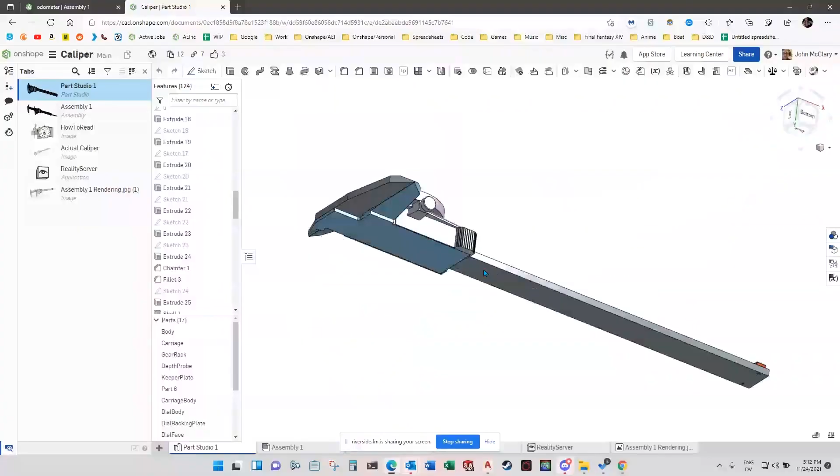Well, let's see the calipers that you made. You see my screen? Yeah, all right. So like I say, I did everything in one part studio - it's a little bit naive to put 124 features into a single studio, but I was kind of learning, and everything was pretty simple really. I worked a lot like I was familiar with, so the learning curve was really small.

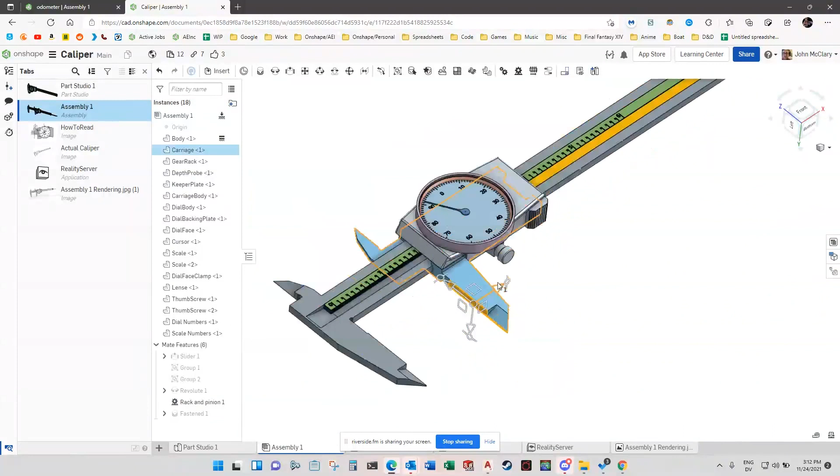Then I went into the assemblies and tried to see if I could get it to work. Oh, look at that, with relations - that's nice, there you go. I was also trying to test how precise that would be when you do an actual measurement with the tool.

I want to see what it actually read out is 1.691. Wow, so I was impressed how accurate everything was in rotations.

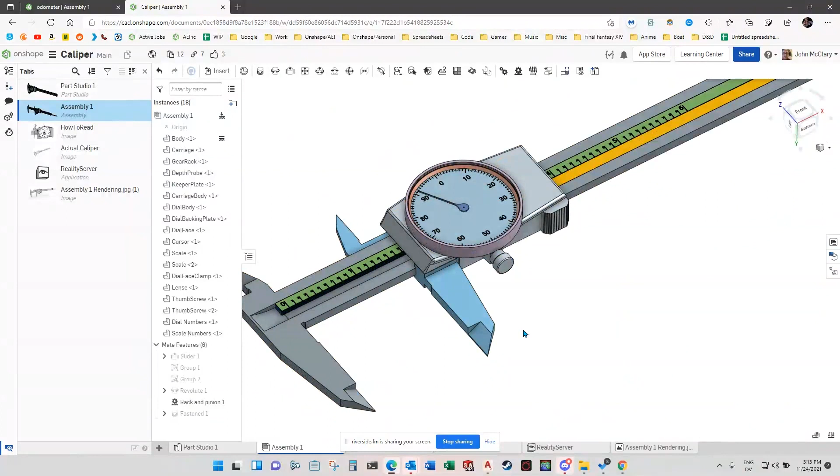So great, yeah, so I posted this on the forum for another model of the week, which never came through. And somebody said something about, you should make that digital. So I didn't really have much experience yet, so that's where it came up.

Well, maybe an odometer style, which is something I've never done before with the relations and rack and pinions. And so I got to learn a little bit making this model, and yeah, that's nice, it was pretty fun.

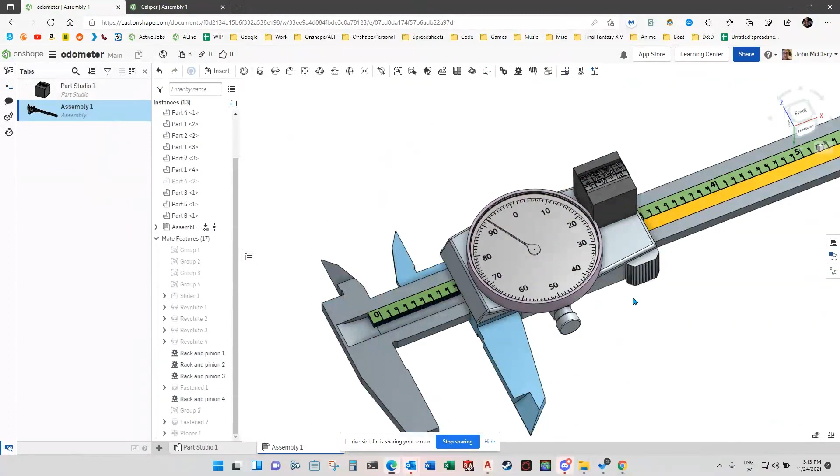Yeah, it's really detailed. It looks great. And yeah, the technique that you use for that too, just incredible.

It's funny because I did something like that more recently, actually, with a dial indicator, and that was fun, just measuring real things, putting digital versions of real things and then putting an analog version of it or a digital version of an analog gauge all together. It was kind of like an Inception kind of. That's right, yeah, that's right. Well, this is really great, John.

I mean, we'll put a link here to the public model that everybody else can take a look at or take a copy of for themselves and try their own hand at some of the work that you've done here. But this is a really great model.

This was done back in the day. It's really a great example of how you can use the multi-body part. So as you said, you had 124 features, and for this part, that's not that bad actually. I'm looking at the complexity here, and it's like 124 features is really nothing.

Yeah, compared to my favorite thing, across how many parts? 18 parts, right? Yeah, but my favorite thing was only 6 mates. That really sold me on Onshape.

Yeah, the less mates, less can go wrong, right? And when you're trying to put something together as complex as all these different ratios that you're applying here, that's really important. So this is awesome.

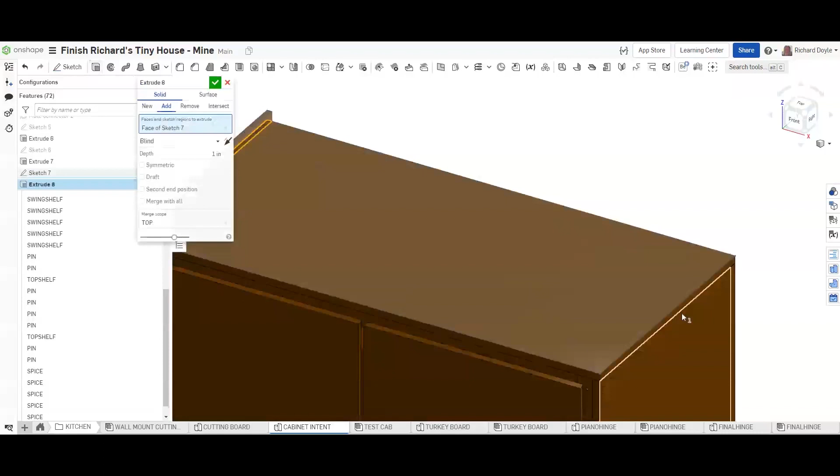We're going to add new items to this. Let's make it about 0.5. Just look at that. You didn't create a sketch, you just picked 2 surfaces and it's going to create 2 parts.

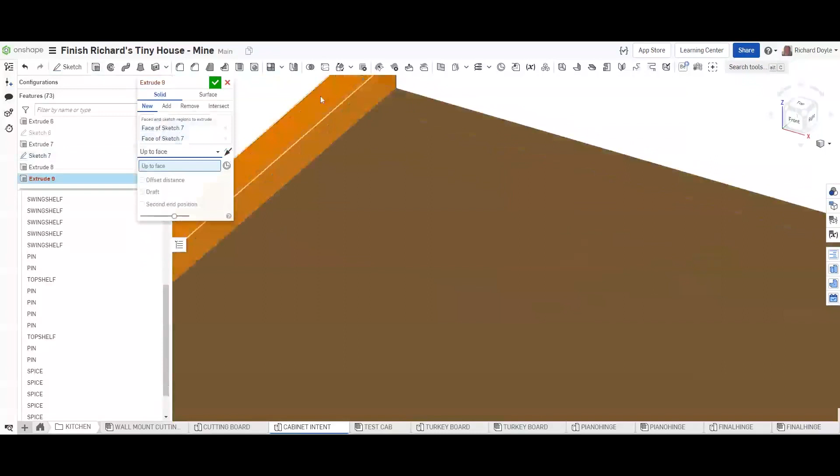Right there, that sketch was there. But you were able to select just portions of it. And I can do the same thing for the end pieces, and we'll just use an up to face.

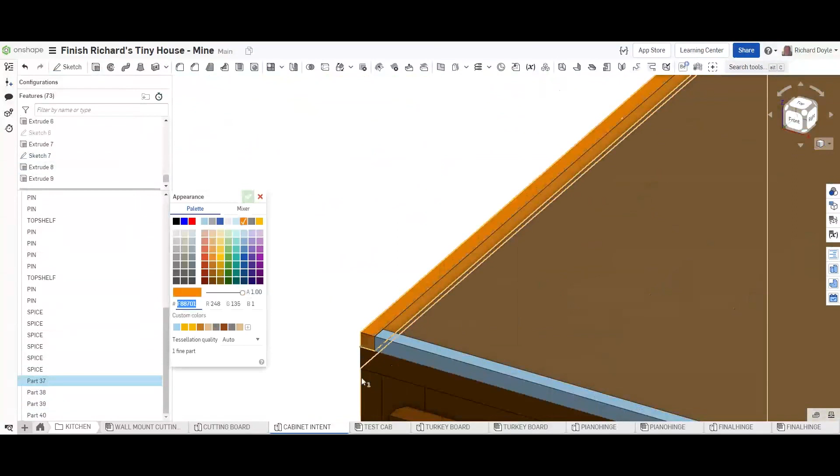But notice now that these are all new parts. You can see them down here, 37, 38, 39, and 40, but they lack material and they lack an appearance. So the first thing I'm tempted to do is right click here and say edit appearance. I don't remember offhand which appearance I had put on the rest of my parts, so I can go back and look at this edit appearance, and okay, so it was that brown color 723.

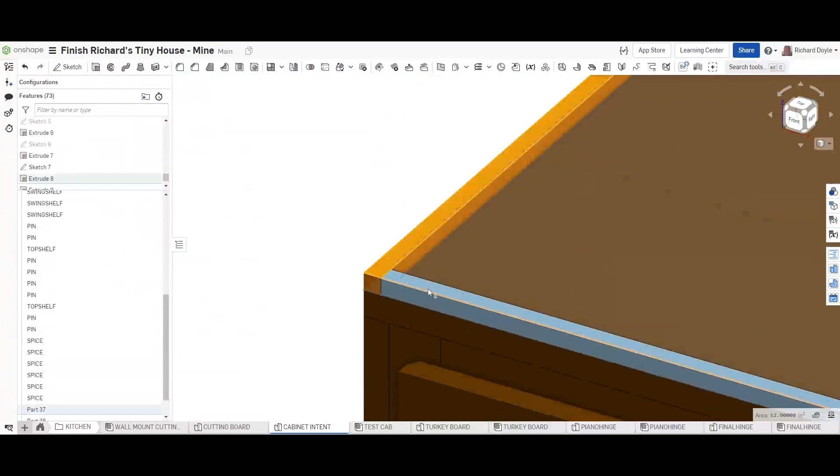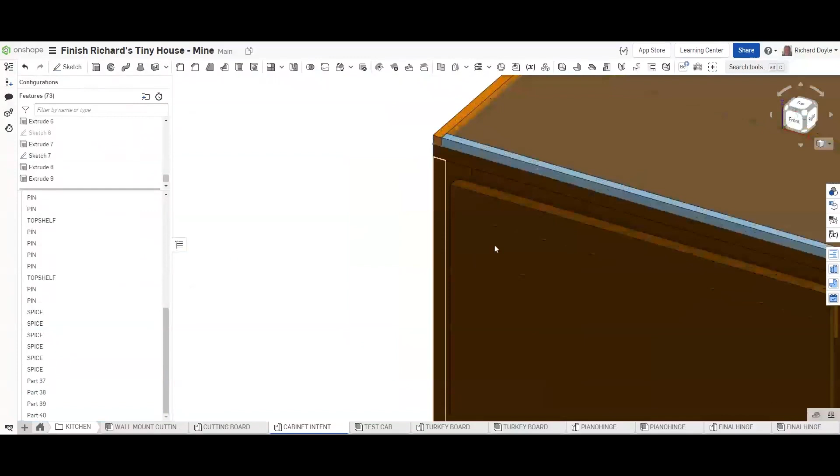That seems like a lot of work. So as I was playing around with this, I know you can apply an appearance to several different parts at the same time. So I went ahead and selected all those parts, and then did my right click, edit appearance. What I noticed was it picked up the appearance of the very first part that I selected. And I had an epiphany. So I went back and picked a part that had the appearance that I wanted.

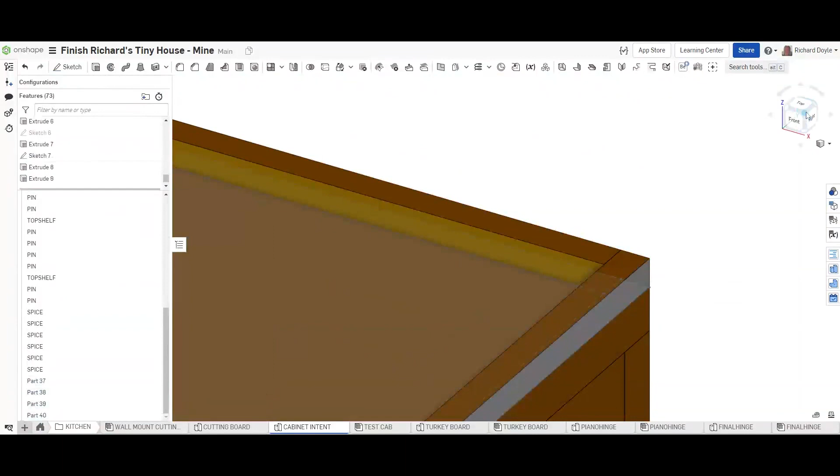Drum roll. Now when I assign appearance, it defaults to the very first one that I selected, and now the appearance is the same on all 3. That's great. So I asked around, I asked a couple of the folks if they had ever seen this before, and I got no responses. So I am going to actually take credit for this tip. And that's what I have for today.

That's awesome. Yeah, and the appearances have become quite rich. In the last 6 months or so, I think we added that appearances panel, and that panel really gives you a great launching point to work with many of the parts. You can even configure the colors.

Yeah, and I'll tell you, the appearance panel saved my rear end the other day, and I'm really glad we have that. So, can I add to that tip? Of course. If you have an assembly and you throw up a bill of materials, then add a column into the bill of materials for appearance.

And you can edit that appearance from the bill of material at the assembly level. Very nice, and same with material as well. So should you want to do that sort of thing, rather than having to find the part studio where those appearances or materials are defined, just throw it straight from the assembly. Great, I'll be looking into that for sure. Yeah, it's quite a novel concept, you can actually edit the material selection from the bill of materials. It's great, how about that?

Yeah, that's awesome, Onshape is so awesome. Typically you can actually put a spreadsheet and copy the BOM, then scroll down or pull it down and copy all the columns and all the rows, then paste it back in. Now you can do 1,000 parts in 1 second, a bulk operation. Wow, that's a great tip, there you go.

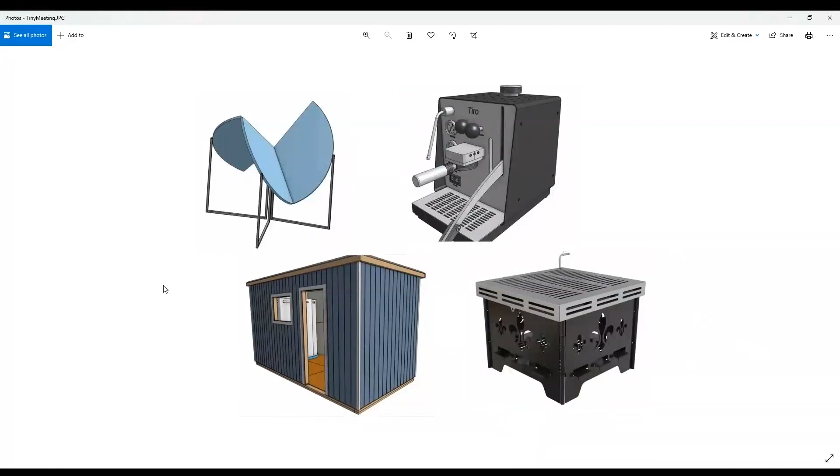He also did this siding with a feature script called Texture. He did a really great job on this and was able to automatically do all the cutouts and all the trim. He showed us that feature script and how it worked, and it was a lot of fun. This project is still going—we'll put the link to the forum post, which has all the information and a link to the public model. It's still ongoing, and we expect to have several more meetings where people can come in and show off some of these things. We'll make sure to put the links in the chat and hope everybody will participate in this little project. So I want to thank John McClary, John Hawk, Michael Pascoe, and of course Brian LaGrange for their help with this.

Yeah, those look great. That folding poker table is pretty cool. I was looking at the tree over there, and I saw a gear mate in there. I'm pretty sure he did something pretty interesting with that gear mate.

That's how it will fold up, so you can see how it goes from flat to folded—you can see it in the picture how it's kind of folding up in a weird way. One of these days I'll hopefully get some animations of that done, and we can take a look at how that folds up. It's like an origami type. The real amazing thing about the other one with the paneling—that was one feature that did all the paneling.

Yeah, amazing stuff. So that's pretty much it, I think, for this week. Mike, what do you think? Yeah, I think we had a lot of fun, a lot of good stories, and we all learned something, so all the goals have been hit.